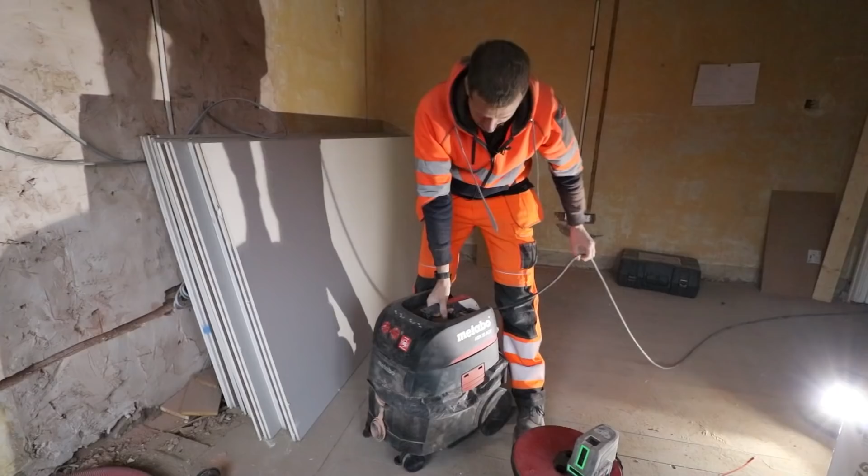Okay, it's Monday morning. Now, as you know, James has been having a bit of a laugh pranking us all, so it's our turn to do it back. So Jay very kindly ordered these in off Amazon, and they arrived this morning. So we love the LGBTQ community, all right? We love them, but nonetheless, it's a good giggle. So we're gonna slap these on his van and try and record him driving to work.

Right, got this camera set up, yeah? You're good to go, yeah? All right. Right, hello. What's someone doing there? To my van. He's just stuck something on the back of my van. There's part of the prank working.

How's my hair? Is it recording? Yeah, it looks fine. It looks fresh. It looks sharp. Oh, James. What about mine? You look beautiful. Thank you, buddy. All right, me handsomes, let's roll. Over and out, micro penis. And Tomo. I cannot believe we're doing

Okay, so house rewire. So this is a blank canvas, what we're starting from here. This was actually in previous content. I'll leave a link for it up here in a previous video. So it's a blank canvas, tenants have all gone, everything's been emptied now, so it's changed quite a bit since you guys last saw it. So head on in. Like I say, blank canvas now, carpets have all gone, furniture, that's all gone.

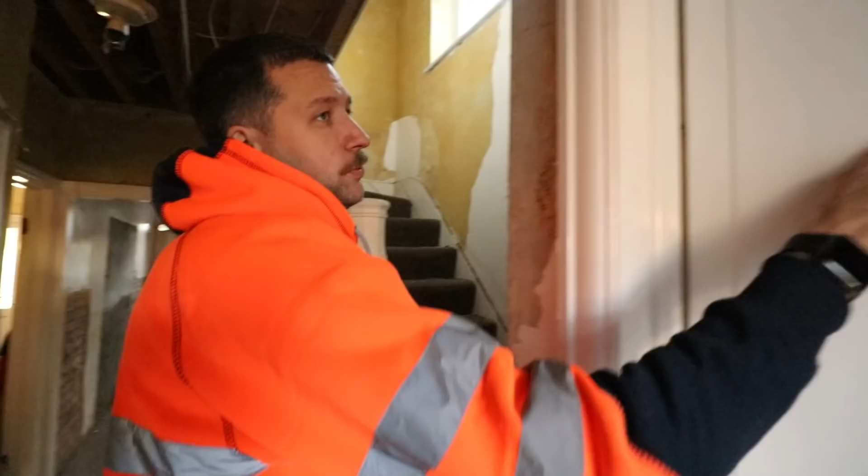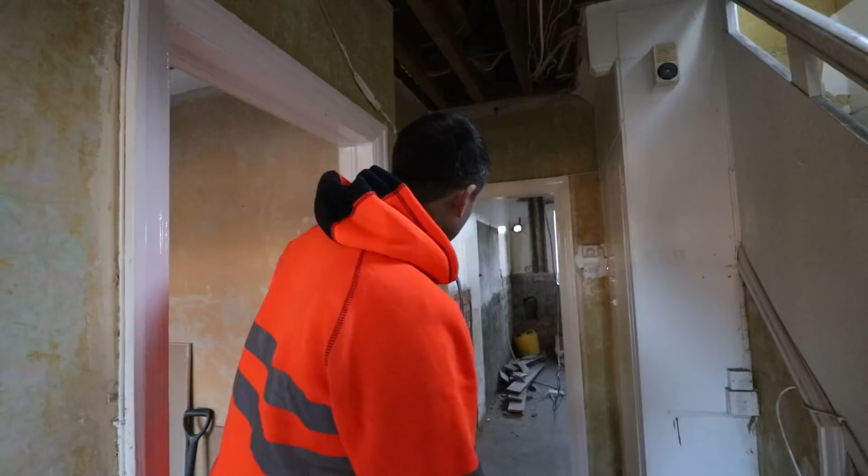Fuse board is up in there, you can't see it at the moment because the steps are in there. We just run this temporary bit of power, so we can just turn off the main switch and cut everything out, because all of this cabling here, we want to get rid of all this. So we've got a nice fresh blank canvas to start wiring in from, and it also means we can reuse the holes in the joists, so we haven't got to drill more holes and turn it into Swiss cheese. So yeah, the builders are out for the week, so that means we've got a completely empty property to work in, which is really, really good.

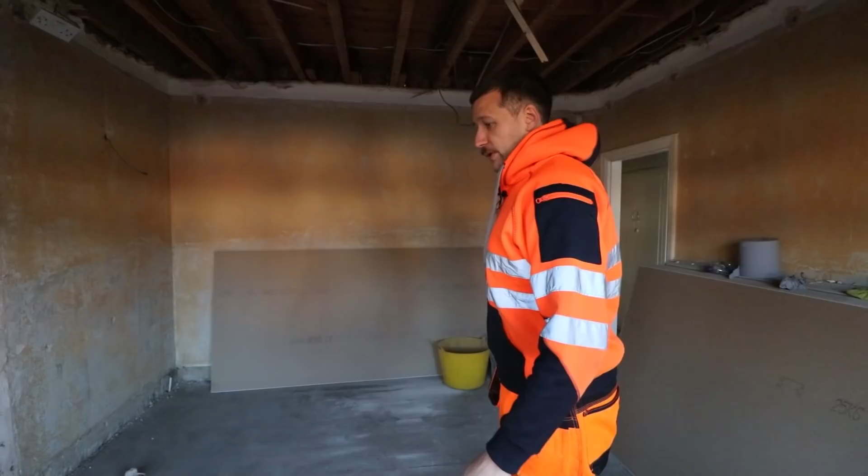So that's actually all their plasterboard waiting to go up, so they're just waiting on the first fix to be done. Now, we can't run anything under this floor because they're going to put like a concrete screed down to put underfloor heating. So that means all our power has got to come from up above. So again, all of this we're going to rip out completely. We're going to reuse as many of the existing holes as we can, but it does mean that our power is going to have to come from up above.

So we've got to chase. There's a lot of chasing here to do. So we have actually got a new chasing machine, which I'll show you. I bought it deliberately for this job because there's an awful lot of chasing to do, and doing it with a grinder and a hoover on little jobs you can get away with it, but on stuff like this you just can't. You need a proper tool to do the job.

So this is the front room. Dining room's through here. So James is in here now sorting out the heights for the sockets and stuff. Yeah, the green laser level is awesome, isn't it? It makes a huge difference. Rather than having the old-fashioned red laser lines, the green ones just pop out much more. So they're really, really good.

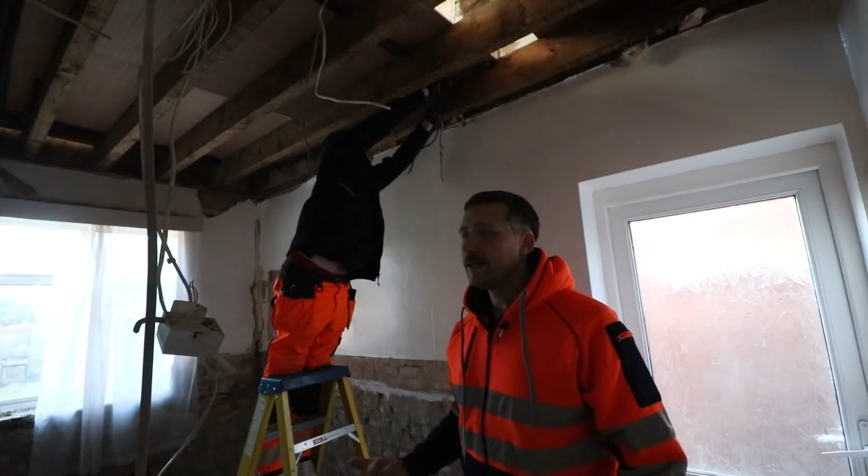So yeah, dining room. Jay's in here stripping out the kitchen. So yeah, this is the beauty of it. We can just cut everything out completely, and it does mean you can work faster. You haven't got to worry, is this live, is this not live? You can just literally cut the whole lot out. I'm guessing he's going to rip all these plumbing pipes out as well, but yeah, that's not our job.

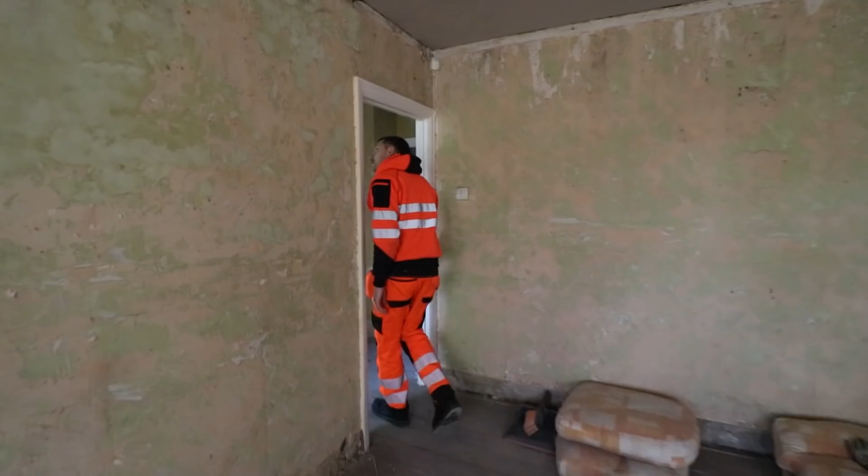So yeah, and upstairs, I'll show you quickly. This room I think was the sort of drug den. So as you can see, it's all empty now, and they've boarded the ceiling already, but we have got loft access just out here. So we can actually run a lot of our cabling over the joists upstairs, and we can cut all the downlight holes out as well. We can get those all cut out today. So there's quite a lot we can do.

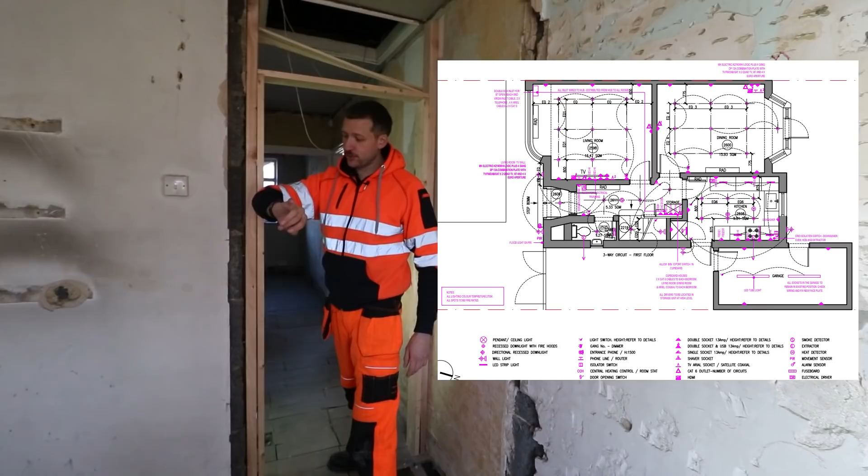I'm not sure what the layout is going to be in this bathroom. I don't know yet. We do have the plans downstairs. So that's what we're going to be wiring this week. Today's Monday morning, it's just coming up to 9. I'm hoping by Friday we will have the bulk of this first fix finished if there's 3 of us here, because there's quite a lot on this plan.

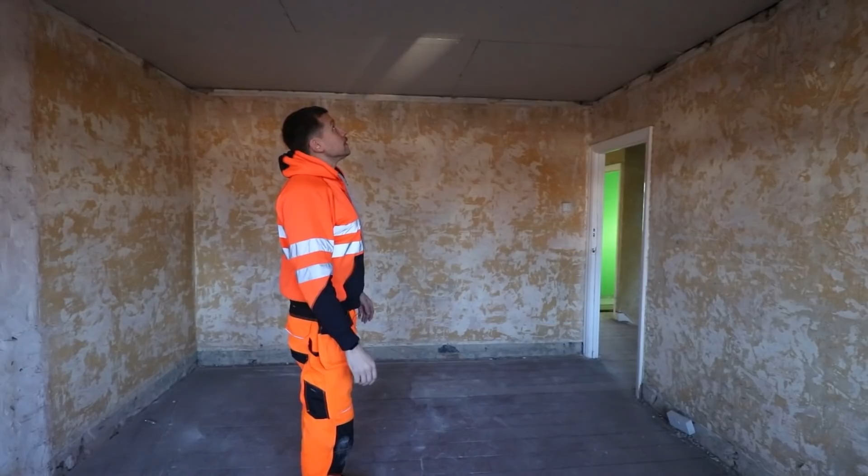Again, next room, plasterboard ceiling again, so it's already been done. We haven't got to worry about lath and plaster, any of that nonsense. We can just cut all the holes out, bang all our downlights in straight away. These sockets up here will be a little bit easier because we're putting them at 400 or 450. I'll check what they want. But again, we can run everything under the joists downstairs and just come straight up.

Light switches were on this side, but I'm guessing they're going to move this side because the door will naturally open towards the wall. So I don't know why they put that there in the first place, but yeah. So light switches will go here. We'll use our chasing machine, put our switches here.

And then yeah, little room in there, just a little box room. Again, completely empty. I haven't actually been up in the loft yet. It looks like a bloody big loft space, but we'll go up there a little later on and have a look. So let me give James and Jay a hand and we'll touch base a little later.

Oh, you've got to be careful, these Bosch, these new... What? No, I've got my own box of them. Your ones. I paid for them. Yeah, but...

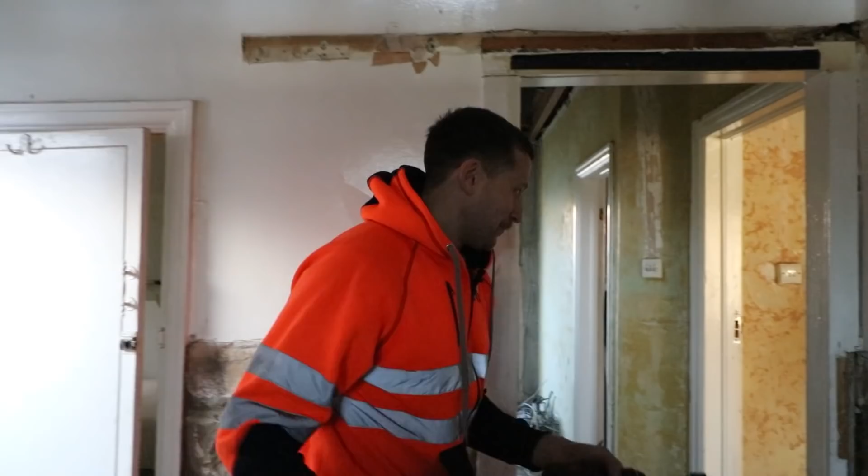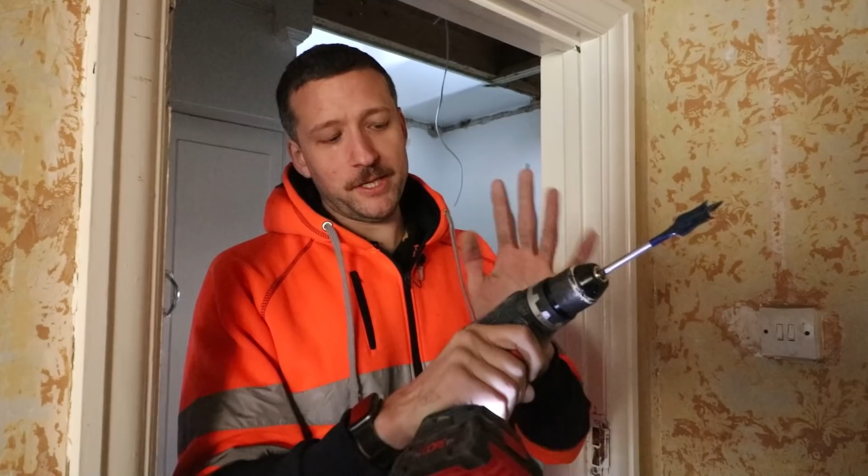No, these are actually my own ones. They're in that Vaunt case. I haven't used yours. The only thing with those bits with the thread on them is you've just got to be careful when you're drilling with them, because they can lock because they pull through so quick. They're brilliant, but you've just got to be careful. That's why I'm deliberately using this drill, because it's slightly less power than the big 18-volt Bosch one I've got. Because sometimes if it locks, it can really hurt your wrist.

So, right, someone's got to go next door and be the good Samaritan, because apparently there's an old couple next door who don't appreciate a lot of noise. Now, obviously, we've got a lot of chasing here to do, and it's just going to make a lot of noise. So, in being good Samaritans, one of us has got to go. So we're going to pull drill bits, and whoever pulls the 16, was it a 16 mil? Yeah. You've got 32, 16, and a 20. So whoever picks a 16 mil's got to go.

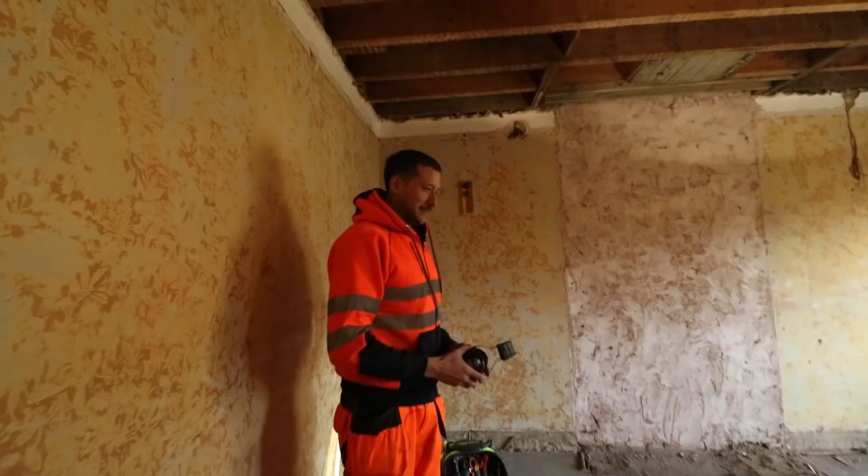Right, Tom first. Straight away 16 mil, yes. Yes! That's a shit game. Let's do another. I'll go around next door and tell her to put these on. Do you think they're going to invite me in for a cup of tea? I'm going with no. They might not even be up yet. Oh no. Here we go. Hi, my lovely. I'm sorry to bother you. You're a star. All right, you have a great day. She seemed very pleasant. That's how it's done, see? I always think she wanted to invite me in for a cup of tea to discuss the work. Nah, she's all right. She's got some china figurines she's got to move, so I'll let her use those, then off we go.

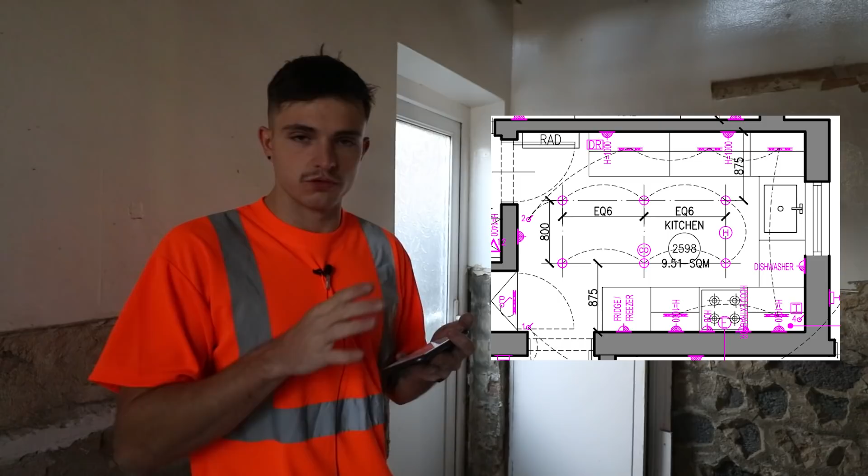Alright, Tom's checking in some lighting circuits. I'm going through the plans for the kitchen now and just marking it all out ready for chasing. So we're going to mark everything out, and then one of us is going to go around and just chase it all out. I'll leave the plans up on screen, but it looks more complicated than it is when you actually go room by room, but there is a lot going on, to be fair. So I'm just trying to wrap my head around each room at a time and working through it, but it's not too bad. So yeah, we'll see you in a minute.

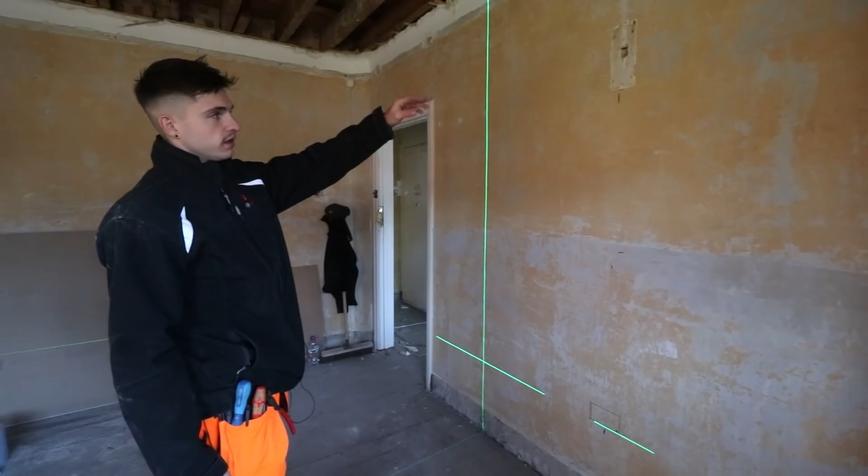Right, I got my jacket on now because I'm freezing, but I'm doing the living room telly, sockets and aerials and data and whatever else. We've got a plan which we'll leave up here somewhere. So it's just about making it look the neatest possible. On the plan, there's like 3 doubles on the bottom, then a couple of bits above. So I'll evenly equal it out center to the room, even though they're probably all going to be covered, but it's just OCD. So we'll start marking it out, show you what I'm doing, and then we'll do the telly bit above. I think they're gonna have a brush plate as well, so they can drop some HDMI cables, and we'll put a bit of trunking in there so you can just slide down and leave a fishing wire in there. So yeah, we'll get to it now.

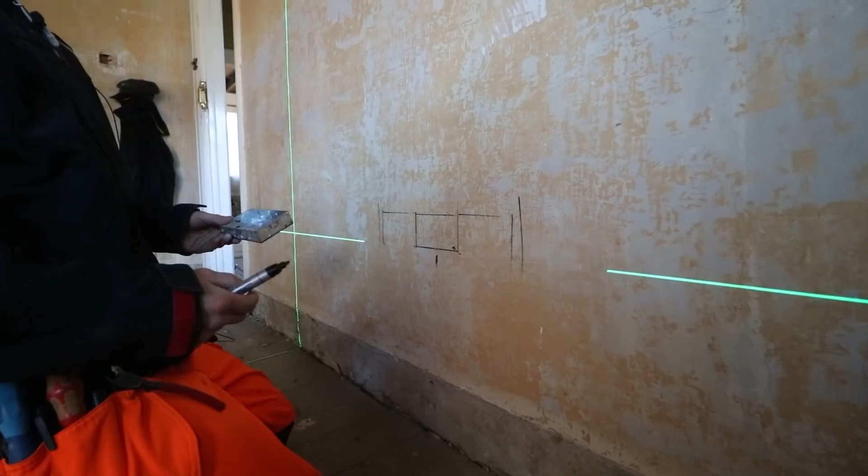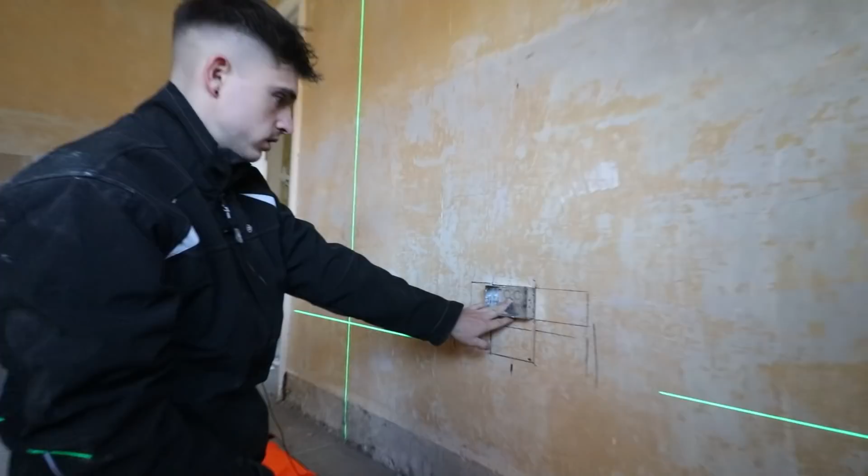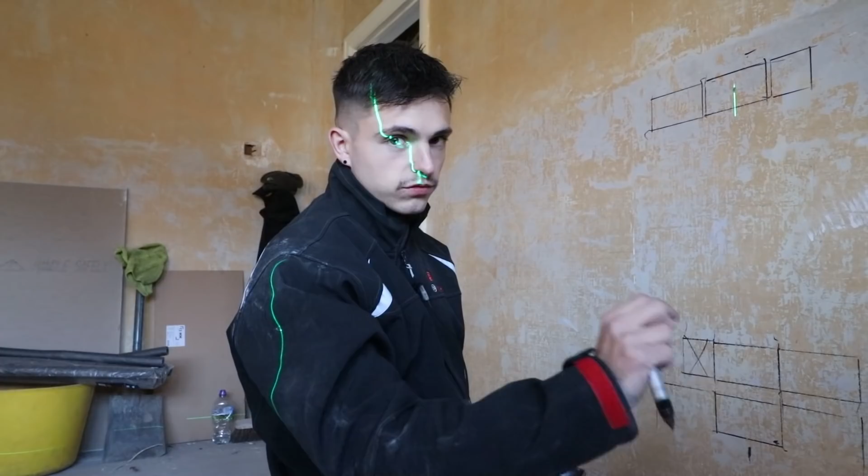Alright, so we want to probably chase to about here, just gives a bit of room, and then it was a double above this one, I probably want a coupler in there or something. Probably better off just cutting out a big square anyway. And then that one's scrap. Ignore that. Then I need a single here. We'll make all these one big chase just going across, and then we'll put bushing couplers in between each one. And the same down here, we'll probably do one big square down here, fix it all with bushing couplers, so we can feed in the cables. It's kind of rough at the minute, but it's just so we can visually see it.

Right, cheeky little update. Lights in the kitchen are done. We're working off plans that have been sent to us, but what's on plans doesn't necessarily work in reality. They had a 7th downlight just here by the door, but it's just going to look weird to have 6 and then this one extra one here. So we've scratched that, and we're just going to keep 6 because it gives a much more uniform look. Sockets have all been marked out, James has marked these out.

Now we put the sockets at 1150 centre, so that's different on the drawings, because if you look at the drawing, it says these have to be at 1 metre, but the top comes up to 900, then you've got 40 mil of worktop, so those are actually only going to be about that high off the top. If they've got a splashback or something going in, which they're probably going to have, it's going to foul the socket. So we put them at 1150, which should give you about that much off the top of the worktop, which is what you want. So you put those in.

Outside light feed, because there's going to be an outside light at the back, and on the side passage there's another one there. So yeah, and then light switch here. We're going to cut all these out a little later. We just want to get the bulk of the wiring in, and then we can run around with the chasing tool afterwards and put all the chases in, rather than chase a little bit, then wire, then chase. It'll just get all the chasing done in one hit.

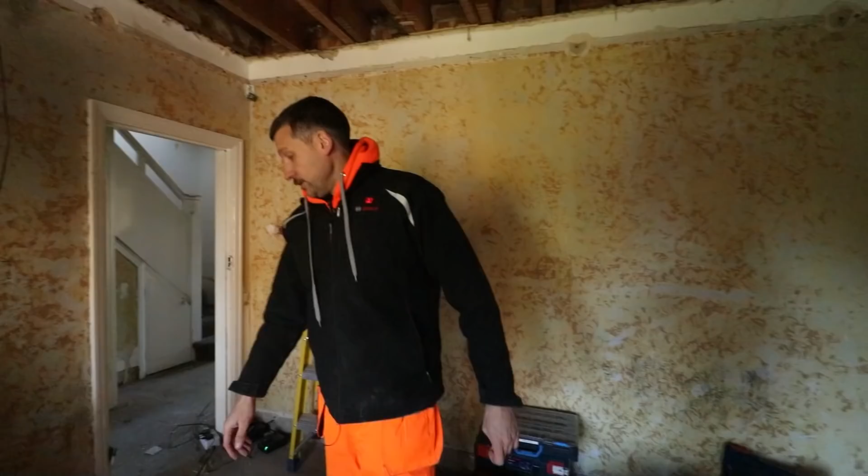If he's watching, I don't know, Pornhub or something, I don't know. That's the only thing I can think of. I can't think of another reason you want to switch it in that combination, but that's what he's got. And yeah, James is this side holding up the fort. He's marking up, or holding up production, I should say.

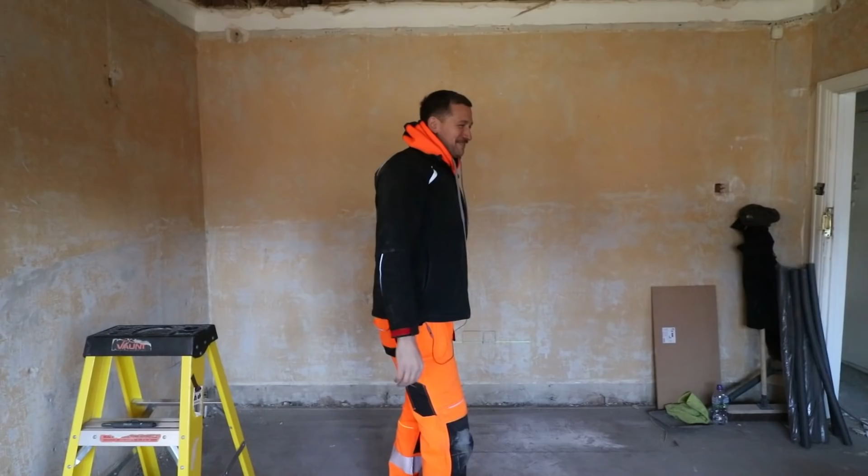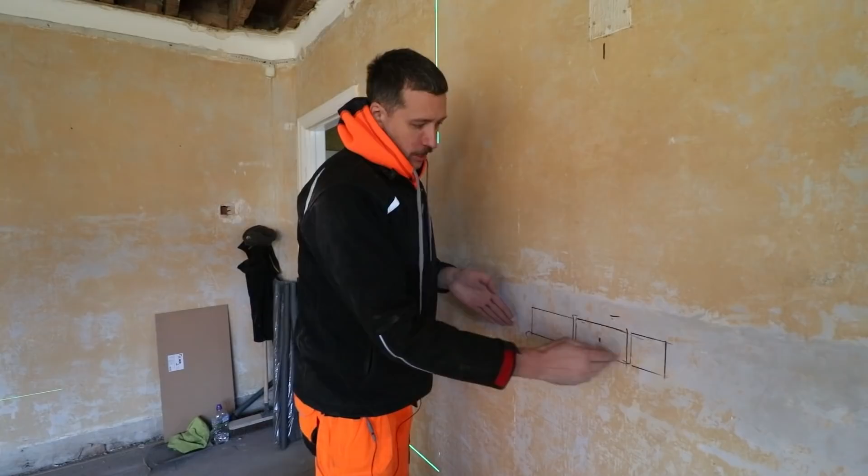He's marking the sockets out again. So I'm guessing, again, they're going to have a TV here or something, because they've got 2 levels of sockets here. So for these here, we've got 2 doubles and a single. I think we're going to have to use the grinder for this. So all we're going to do is just take a nice clean grind there, 2 cuts down, and then you can just chip this out with the SDS. I think that's going to be how we're going to do this.

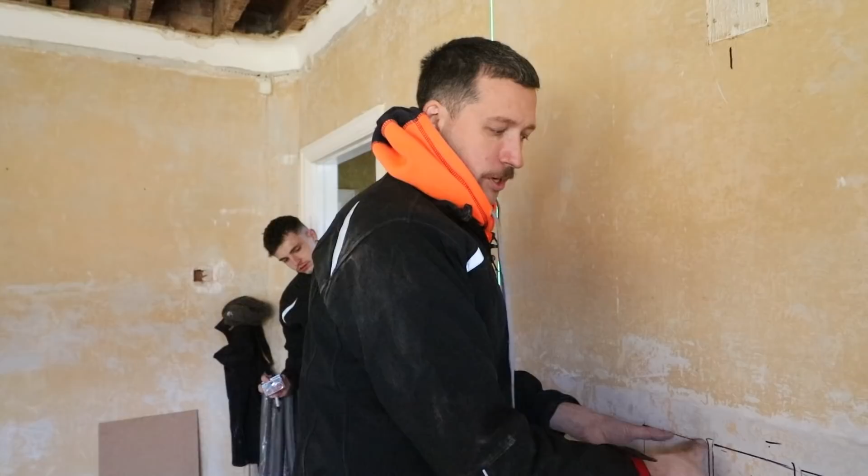And then the boxes, we're going to do what you saw us do on the house rewire. It was quite a while ago, but you get 2 boxes, coupler in the middle, pair of bushes. That way you get a really slick finish, and the distance between the boxes is exactly the same every single time. So it'll be quite nice down here where you've got different sizes of boxes and stuff, a really clean, uniform finish. So that's how we're going to do those. And I'm going to come in here now and do the lights in here.

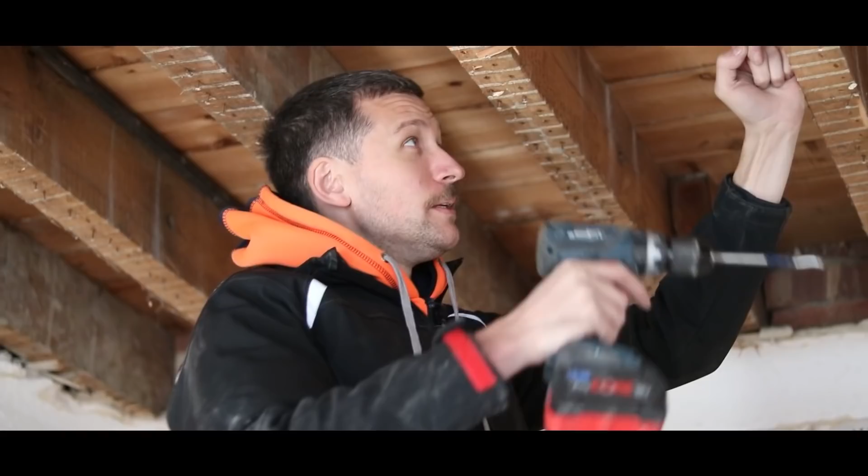Right, little tip. When you're bashing through joists to run a new set of holes in for cables and stuff, and I'm only saying it from my own experience, when you start a hole, just feel on the other side. Here I don't have to because you can see the whole lot. But when you're lifting floors up and you can't see everything, just have a little feel on the back and make sure there's no cables or pipes there, because I've done that before, boshed a hole through and hit something on the other side. So it does pay. 2 seconds, just give it a little feel.

But it has to be said, these Bosch bits are just superb. As soon as you catch a nail or something, you might as well throw it away. But as long as you don't catch nails or anything, they are so good. They're really, really good bits. I used to use the spade bits. I mean, this is a spade bit, but it's got that helix head on it. The normal spade bits, which don't have that, they're great when they're sharp, but they do blunt quickly. But that just helps it pull all the way through the joist.

So they are really good. Jimbo has asked, does Tom have the keys for the house? Yes, I do. He most certainly does, and we will wait for you here. If you have, oh, you already pulled out, alright, so all good. Thank you, micro penis. Just so you're not mistaken, that was humongous penis. Micro penis is driving and he is unable to talk, but it was humongous penis. Just, I know you were confused, it's fine, don't worry. It's an easy mistake, but yeah.

We're just on the drive home, and James wasn't too happy this morning about the little prank we pulled on him, so we put a different sticker on his van for the journey home. Go on, go on, go on. Oh, my bag's just gone flying in the back. He's only gone and pulled out, lads. What one is that you put on it? That's so gay. I can't even drive straight.

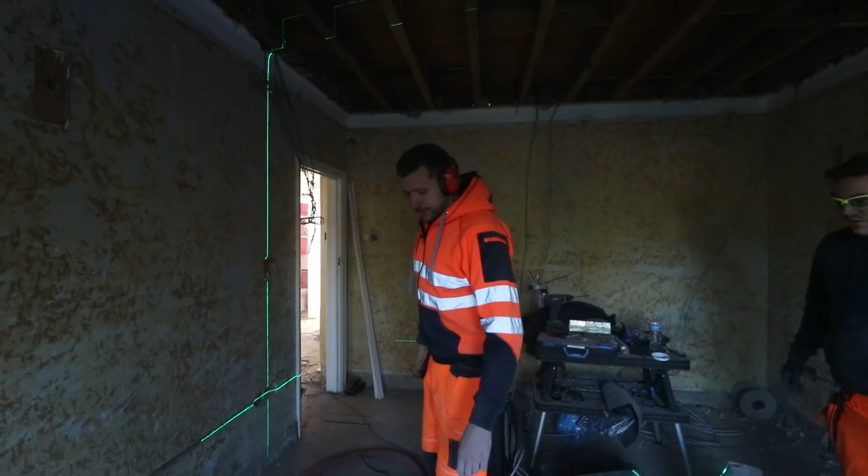Yeah, that machine. Hard work, innit? It's not too bad, but it does feel a bit weighty. When you do the upright ones, the more you start going up, the more it hurts. My shoulders hurt quite a lot, but that's a fantastic machine. Yeah, so this machine is mostly for doing the chases, the upright chases, where you've just seen we can put the capping straight in the wall, in fact.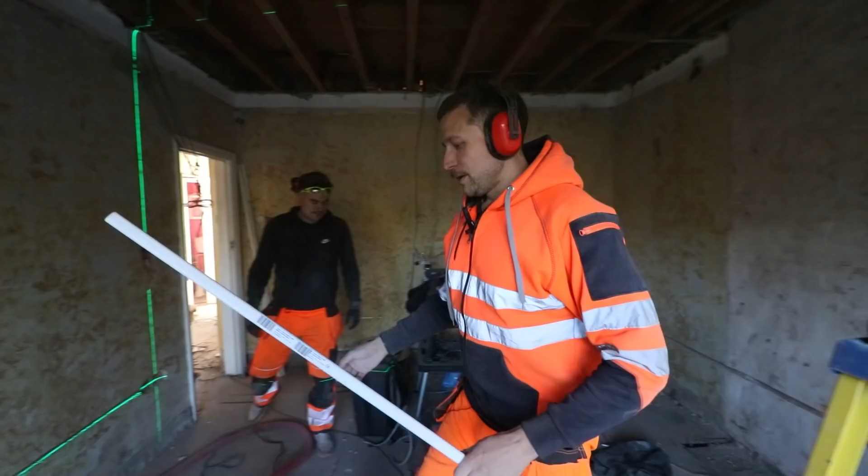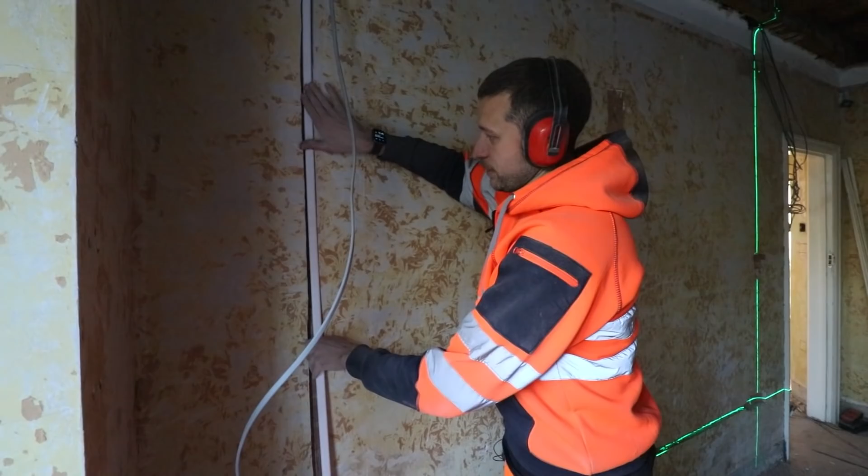But yeah, you just basically run this up the wall, it cuts out after you, so there's no SDS, no faffing about, and you can just put your oval pipe straight in, job done. So it's super fast. But what we've also found is we can use it for back boxes as well. This is a 25mm box, but you get the gist. What we've been doing, cheating a little bit. Well, it's not cheating, it's just finding good ways to work.

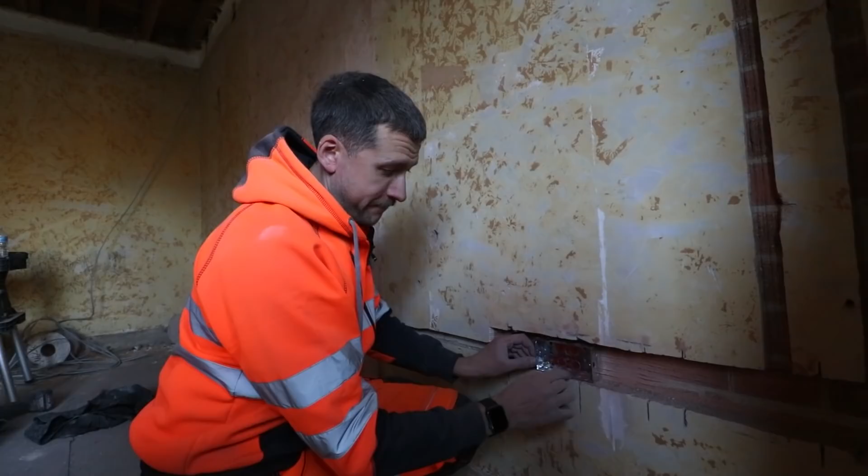But there are 4 double sockets going along here. We can fit 35s in here. So we're going to put, this is a 25mm box. But what a smooth back you get if you use that machine. You just go once, twice. You have to do 3 cuts for the height of a box. So 1, then do another one, then do a 3rd one, and that's it.

But on brickwork, you know when you're just using SDS, you can never get a smooth back when you use an SDS. Doesn't matter how good you are. You just can't get a good back. So doing it this way, you just get such a smooth, neat finish. And it's just lovely, you know. It doesn't matter where you put that box. It's always level, it's always the right height.

So although the machine technically wasn't designed for that, it shouldn't hurt it because you're just chasing the wall out just to fit a box. We didn't think we could use a machine for that, but that's actually a real hidden gem of an advantage.

This is what James is doing now. It's the only way you can get them nice and beautifully spaced and all symmetrical if you just use 20mm couplers and bushes and you join them all together like that. But by the time they put their dot and dab over that, you've got bags of room, you know, happy days. By the time that's finished, that will look really neat and everything will be perfectly symmetrical.

When you put sockets on top of each other, you can't really keep that bit, because this is quite loose, see? It's just this old plaster, so this all naturally falls out. So in the end, we were just like, I'll just get the cutter and just cut all of that out. And then you've got one nice blank canvas to work on. That'll look nice when it's done. That's the plan, bushes and couplers. As you were, mate, sorry.

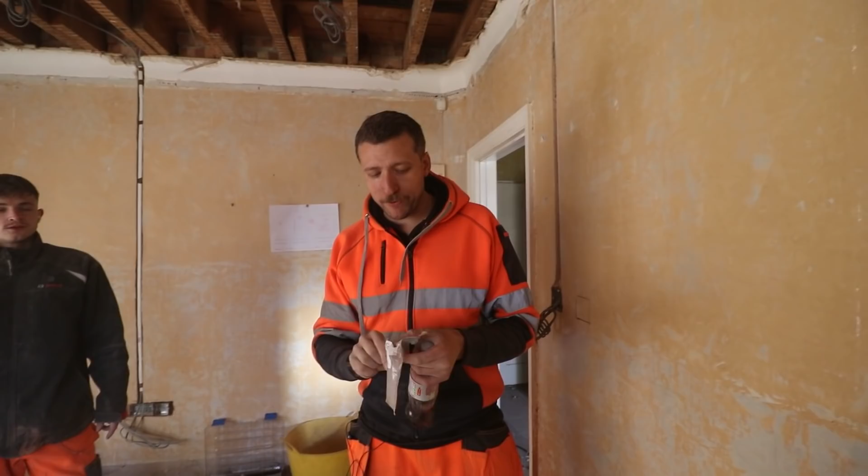To hold the capping in, we're using these little 20mm oval clips, like that there. And then you can just take the capping and click it straight in. So you haven't got to faff about with screws at a 45-degree angle and stuff. So that's quite a good little idea. You just use them, bop, bop, bop. It's very quick if you've got all the right gear.

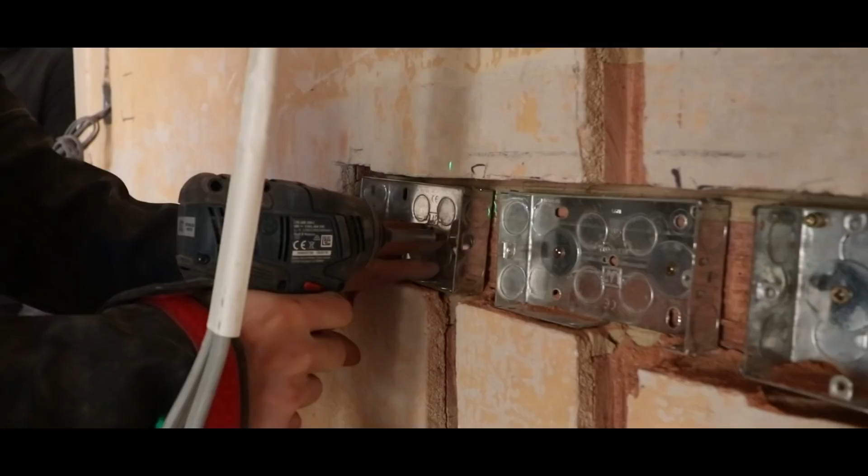That hurts your shoulders when you're doing it all day. I said in that review, I'll leave a link here for it again, it is easy on the first one, but when you're doing it for like 8 hours solidly. Jay, we've been doing this since 9 o'clock this morning. We couldn't make any noise till 9, so we started bang on 9. And to be fair, we've worked that machine hard all day.

We've been taking turns on it. James started this morning, I did the lunchtime bit, and I've just done one now, but Jay's doing the afternoon slot because it is hard work. I can really feel it in my shoulders. It builds your muscles up if you did that every day, but it is a good bit of kit. There's no dust or anything. I think I've said that about 100 times.

There was somebody in the comments, I think on James's last video, I'll leave a link here. Somebody got really angry because he kept saying the word obviously. I mean, obviously it is irritating, I get it, but that's just how he is, obviously. It's just a habit, you know, you just have those things, obviously.

The fella here, he's got sockets and he wants to run data to a gigabit switch out in the hallway. I can't run it down the same pipe, so we've got to do power in one chase, and then I'll do another one here for a pipe for data. Once we've done the chases, once we start putting the boxes in and wiring it, it'll make more sense.

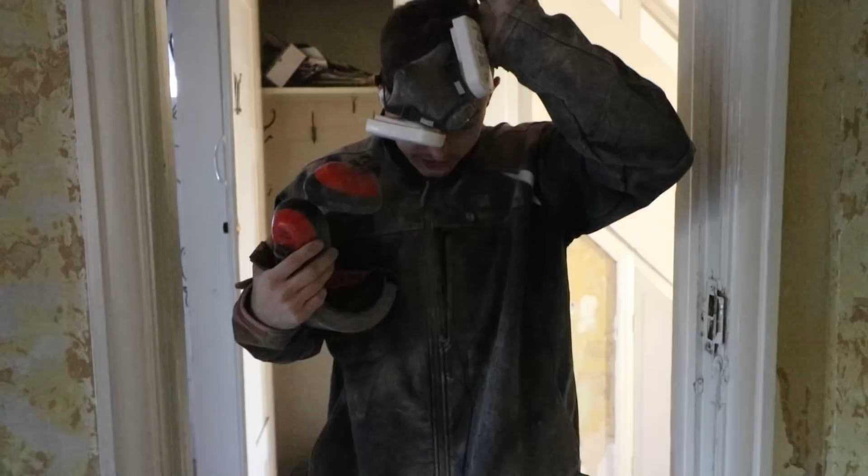Oh no. What a day. Do you want me to show you what I've done upstairs? Chasing, I love it. This is what I live for. Forget the board changes, I just want to chase from now on. Come on, let's go upstairs. Watch all this dust fall off me now.

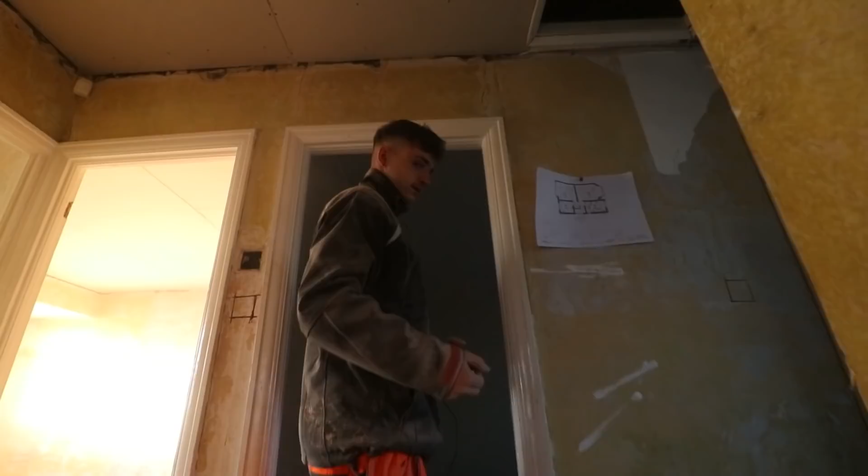Absolutely none, don't worry. Yeah, it's a bit dusty.

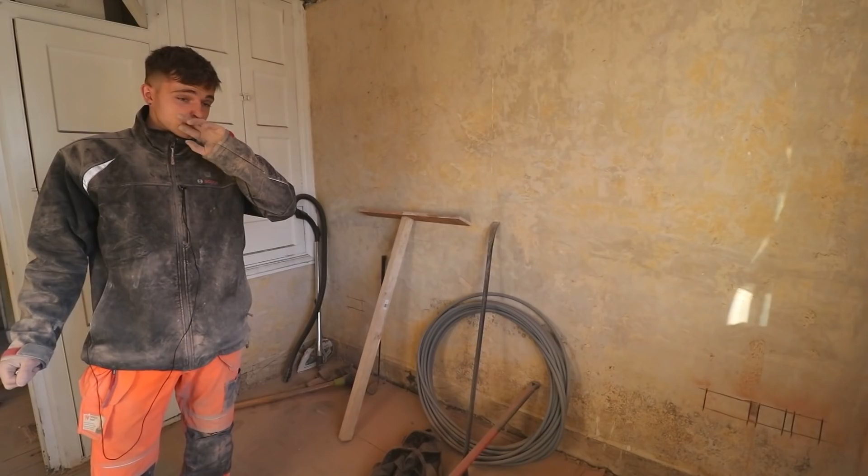So all I'm doing is just outlining the boxes ready for the other chaser, the big chaser, just so we know exactly where the boxes go. Because obviously when you do one big line, it's hard to remember what was there exactly, and it just makes it easier for the next chaser. So yeah, I've just gone through all the rooms to do that.

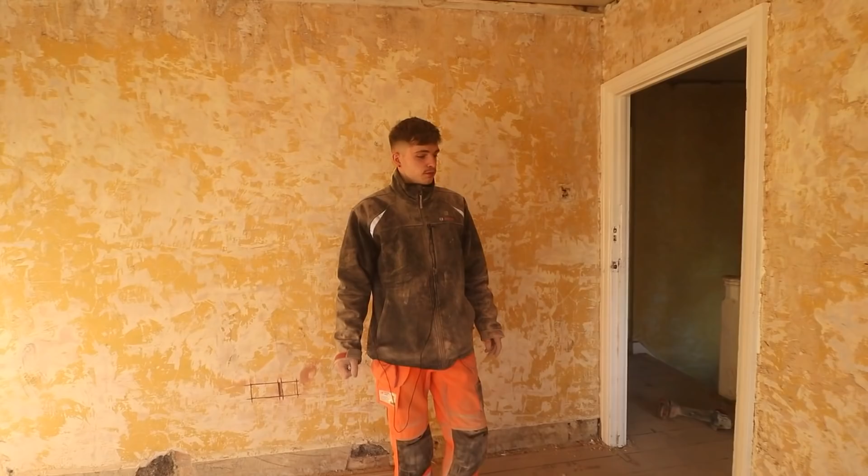But yeah, I'm waiting for the kitchen to be chased out downstairs, so we can start running all the cables in, finish down there, and then come up here. So it's just something to get on with. But hopefully that can be done today now, and then by tomorrow I think we should have everything wired, chased in and fixed back. But we'll see.

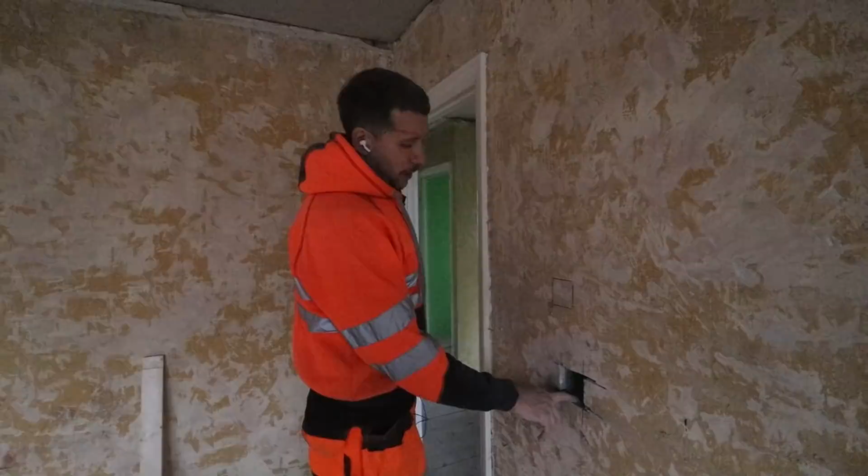Now, we are facing a slight issue. These inner walls, we want to fit 35mm boxes because it gives you more wiring space, just makes it a bit easier, especially when it comes to second fixing. Harder to do on the first fix, but easier on the second fix. Only problem we're finding is this is a really thin wall, and you fit 35mm boxes and you're blowing through into the next room. I can put my whole hand in there, you're punching through to the next room.

I don't want to fit 25mm boxes because they're harder to wire into, especially if you've got, like here, a 3-core strapper, feed in, feed out, switch wire going out to the lights. It's a lot of wires to fit in a 25.

It scared the shit out of me then. A little attempt at humour was that.

So I think what we might do is put a 35mm box in, get some of that low expansion foam, and just foam the box in, because we're not going to be able to drill any further in to get a fixing. So we might do that on those, I think. Same with this wall here, trying to fit a 35mm box again, blown through. These are just single skin walls. There's not enough.

No. It's all right. As long as it's nothing to do with my vans, I don't care.

See, this is what I'm on about with brick. Jay's up here because we've only got one of those Metabo machines. He's using an SDS to dig out the back boxes, and this is part of the problem. When you use that Metabo machine, you get a really clean cut at the back. This is wonky, wavy. It's just a bit crap. But I might come up here with the machine and see if I can neaten these up because, yeah, single skin. That's what you get.

Downlights, we'll cut those in today. I've got the downlight cutter, so we'll measure all those out. You can join in on that. We can cut those out later on today.

Yeah, sorry mate, you're all good.

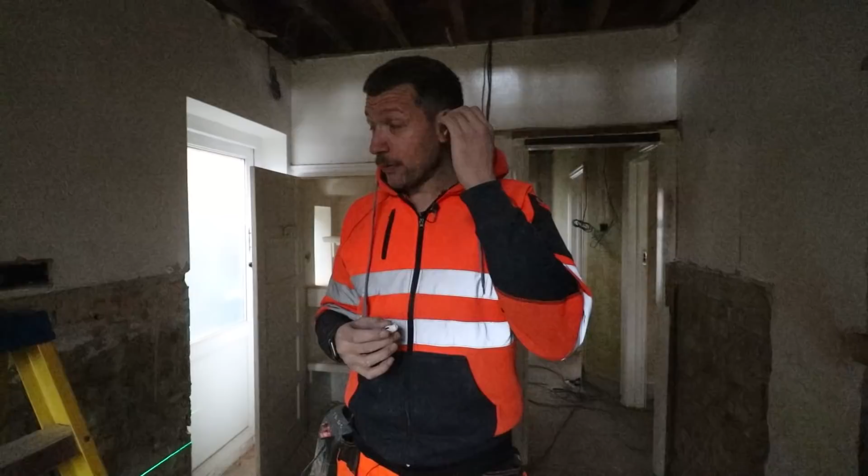They're just 180 quid and they're worth every penny. Actually, they're really good on the tube because it's so noisy, especially when the trains are turning the corner on the rails, and you just put them in, switch on. You don't even have to listen to music. You can just activate the noise cancellation bit, and it just drowns everything out, and it's just like being in your own little bubble. It's fantastic.

Found Sarah an iron. Perfect. Chuck it in the van. Excellent. Sarah wanted an iron, just found one.

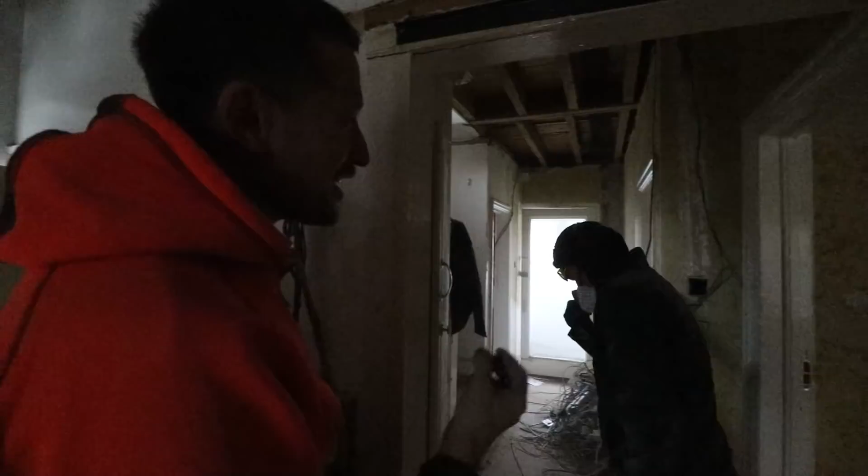Perfect. He's a bit weird, is Jay, but I like him. Huh? All right, mate? Tom's a bit weird as well, but I like... God, I didn't think you heard that, mate. He's a good fella. I like him.

Right, this is smooth, right? I've worked out that if you're really nice to neighbours, they actually don't mind if you just tell them every day what you're doing. So I'm going to be really nice because they're an old couple, right? I'm going to go to Tesco now. It's not very posh, but I'm going to get some flowers, drop them by, say thank you. She's going to love it because we're making a cataclysmic amount of noise against her wall today. So yeah, watch this, and some chocolates, depending how expensive they are.

She is old. What do you think she likes best? She'll probably take the price tag off. She's going to love this. Every woman loves Ferrero Rocher. The problem is, you stand here in the queue, and it just looks like you've cocked up with your girlfriend or something. 13 quid. She better shut up after I give her these flowers. Let's take the barcode off and price tag. This better be worth it.

I think it is, because it does make a difference, and it's easier to work, and they're far more forgiving of noise that you make. To be honest, I don't think they can actually hear, because James went there yesterday, and the husband answered the door, and he had to repeat what he wanted to say 3 times before he heard it. So I actually don't think they can hear very well.

Heya, sorry to bother you. It's just a quick bunch of flowers, just to say thank you for putting up with the noise next door, because it's not nice to listen to the noise. Well, today's the last day of noise anyway. No problem. You have a great day. To be fair, the noise in her house, I can hear Jay upstairs hammering away with the SDS, and you can't hear yourself think in that house. So it isn't nice, but little gestures like that do go a long way. Listen to James.

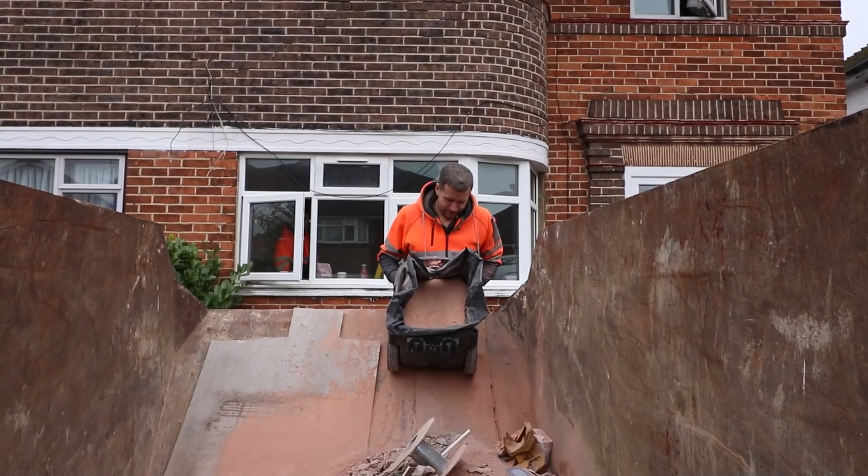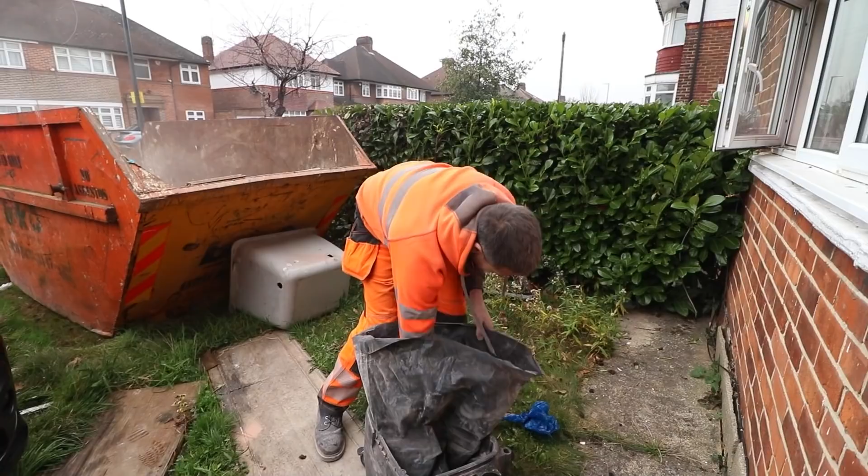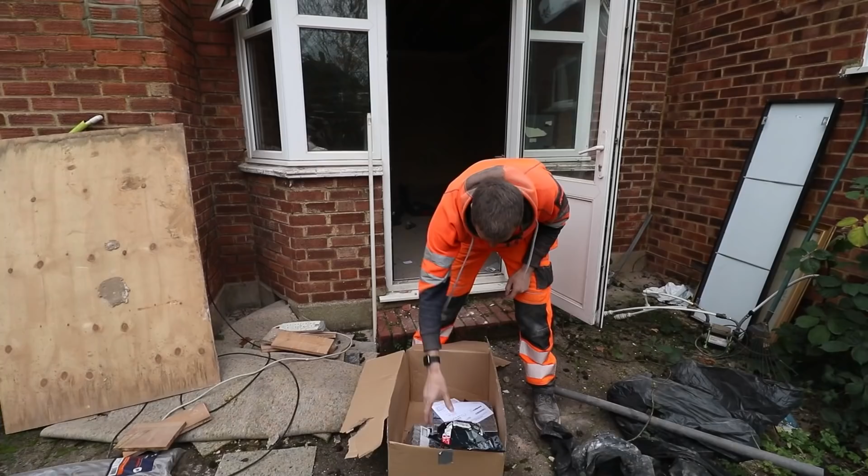That was easy. All right. Now, Screwfix has turned up our order. Wasn't too bad. I got a second mask as well because we need one in there, and a load of back boxes, and they give you free chocolate if you order. Apparently, because it's the second time we've done this. Well, I did it the other week, but yeah, they give you chocolate every time. Yeah, I didn't actually see how it turned up. Apparently, the camera guy saw he was on a scooter. I don't know how he fitted that on a scooter, but

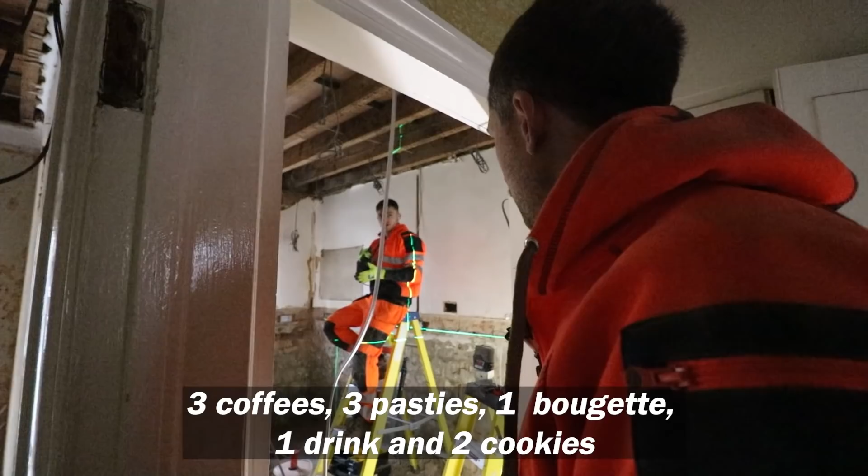Do you want a piece of 12? Because I'm not giving all to James now. Yeah, I'll do it. You can, yeah, you bought it on my fucking credit card. Hello, you. I bought that on my own credit card. £25? Yeah. Shut up. You did. What are you on about? All of that shit, mate. What are you on about? What, the coffee? 3 coffees, 3 pasties, 1 baguette. But he buys himself an £8 baguette. Drink and 2 cookies. Do you want a bit of chocolate? Yeah. Right, would you like a bit of chocolate? I might, thank you.

Right, anyway, yeah. It's going all right. Bosch man here is doing all the sockets in here. Laser levels are brilliant. You literally can't do sockets in a kitchen without a laser. They are fantastic. Yeah, it does make a difference. It just makes it so much easier to line up sockets. Otherwise, you're measuring off beams and stuff, and you don't know whether those are level or not, and you end up following whatever you're measuring it off, but doing it this way, you get a perfectly true reading every time.

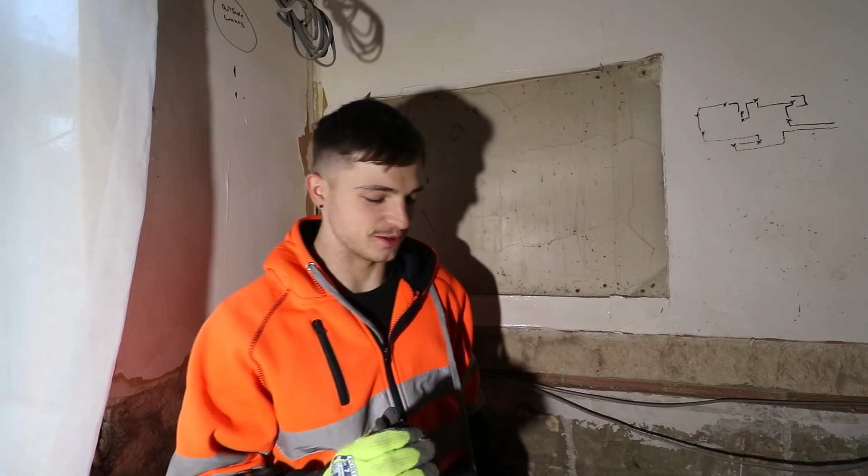I need to ask people about the Instagram. So I had a girl follow me, and my girlfriend knew in 2 hours that I followed her back. How? She won't tell us how. She hasn't got my account details. How does she know? Honestly, she won't tell me. It's creepy. We are all single now. Yeah. Girls. No, this can't stay in the video. This can't stay in the video. I'm staying in, I don't care. I don't know. I'll have to check it. I don't know if it's going to stay because it's going to cause more issues. I'm the boss. That is staying here.

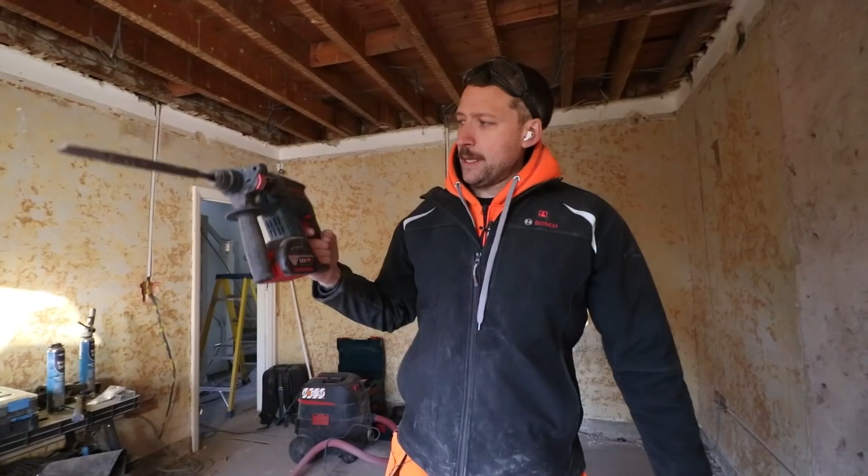Gotta be honest though, that was the one Bosch sent a couple of weeks back. You know, I did that Bosch unpacking video. I'll leave a link for it up here.

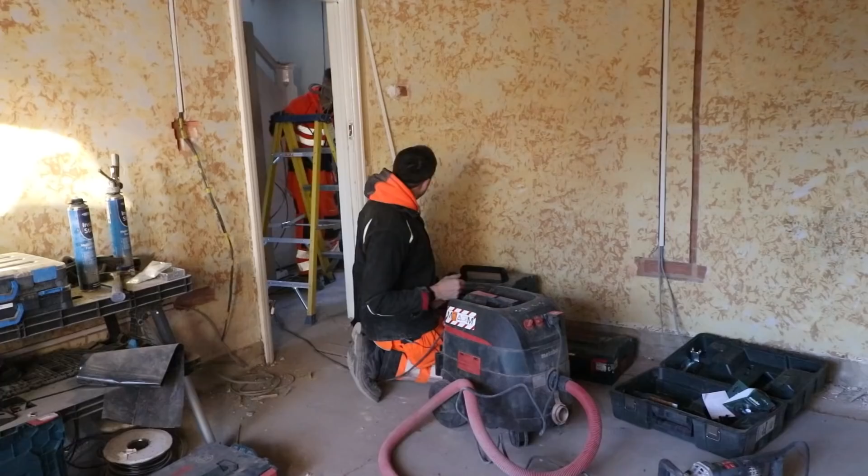That is small. In fact, where's the small? Hang on. Let me go and get the bigger one. Let me go and get my big one. Come here a sec, look. James, he's in a world of his own now. He's listening to Postman Pat or whatever it is, but he's so paranoid about his tools, right? Bear in mind, right? I provide them, yeah? He's labelled everything of his own.

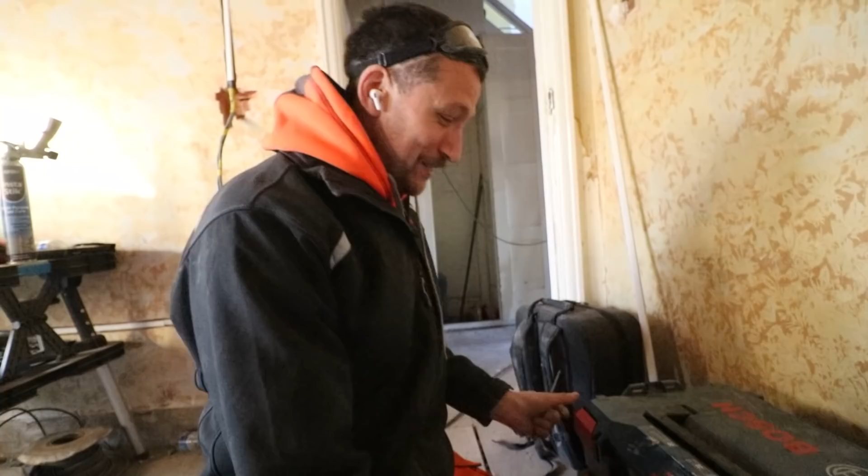Yeah, the point of it was this one, this big Bertha. This is... Yeah, point is this big beast here. This one I think had 2.7 joules of impact energy, I think. And this one I think's got 1.5 from memory. But that is much lighter. It's a proper light. That's good if you're doing like big holes in walls. Yeah, if you've got like a 32mm hole you want to bosh your way through. That one, we've got the SDS, the chisel bit on it, and you can use it for that, but it does take longer. But if you're literally just boshing 5.5mm holes, which is what most sparks do for like red plugs and stuff, honestly that's more than enough.

A little mini 18 volt, I really like that. It's got more guts. Do you remember when I had the Milwaukee one? I had that 12 volt Milwaukee gear, and I swore by that little 12 volt Milwaukee SDS. Well, this is good because it's got the hammer action only on it, which that one didn't have. Tiny bit heavier than that, but lighter than this Bertha. When you're on the top of a ladder, that gets a bit cumbersome. But that's another one I'm quite impressed with. There was another tool I meant to show you, but I can't find it now. We'll discuss it later.

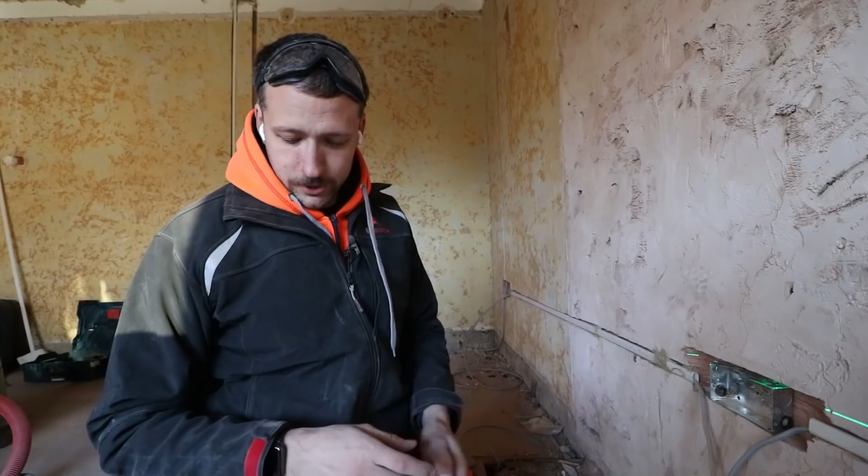Right, tip 6274. When you're working with back boxes, when you put the screws in, you can use countersunks like that, right? I think I might have mentioned this already. They protrude on the surface, and sometimes you'll get neutrals and stuff, they'll catch them and you get neutral to earth shorts. If you buy the pigtails, the curly whirly ones, they come with those screws as standard, but I find we normally take those out and use a 1.5 inch 8 because they're better. But if you take those screws, they've got a really flat base, and when you use it with a 5mm penny washer, you get a super flat finish.

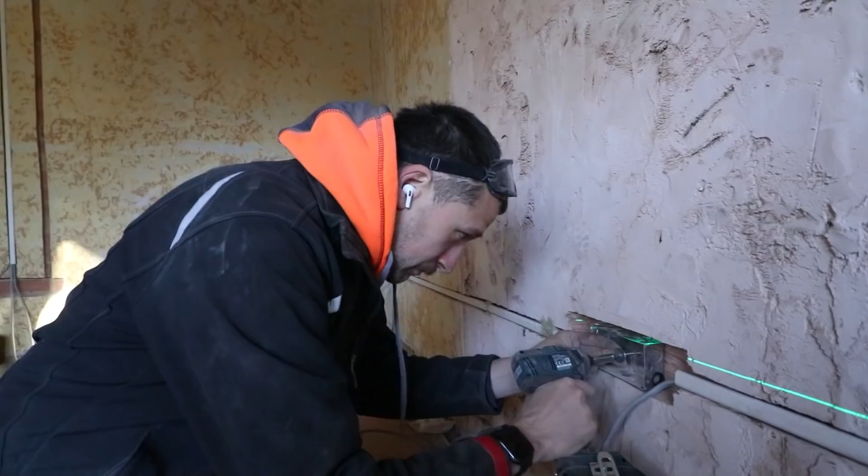Look at that bad boy. And it just looks nicer in a back box. You don't get any sharp edges or anything like that. So it just gives you a bit of confidence, I think, when you wire in the box and you push the socket front back onto the back box.

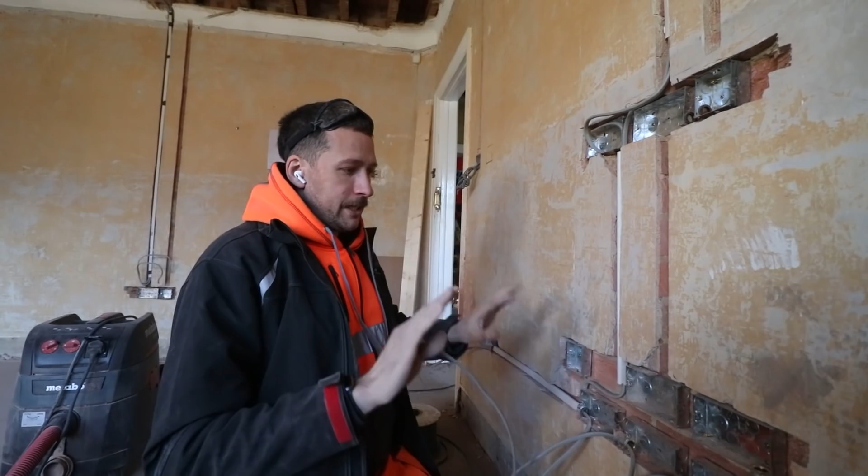Right, Team Nagy. So I'm wiring up the first fix for the TV and data area. So living room, he's going to have, I'm guessing, quite a big multimedia system here. So I wanted to put 35mm boxes, like I said, wanted to put them here. We can't, this wall just doesn't allow it. We blow through the other side of the wall.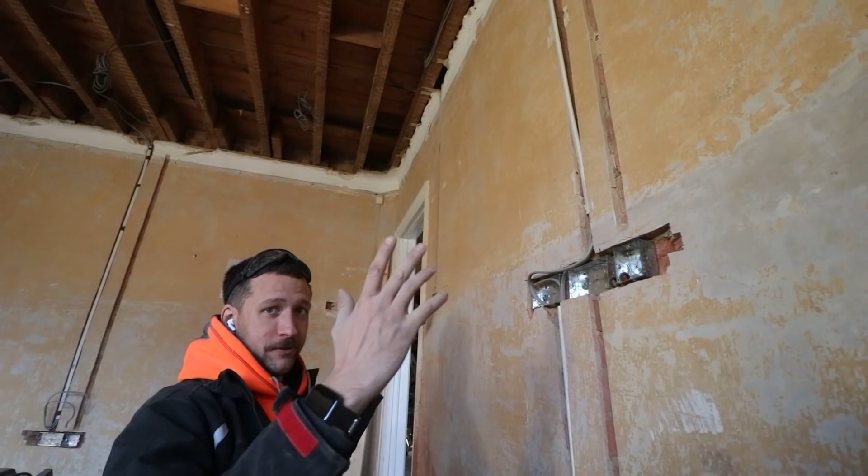So we've got to put 25mm boxes here, whether I like it or not. I actually thought these would have been higher up, but on the plan, that's what it says. So I'm putting them where the plan says. I thought they would have been higher up. You have a big, like 50, 60 inch TV, you'd want to have these higher up. But I'll check, but I'm going with what the plan says.

But anyway, a double socket, a brushed plate here. So the TV will sit, the bracket's going to sit here or something, and the TV will sit over these sockets. So you've got a double socket. This is going to be like a brushed plate. You know the plate with the brushed sort of feathery brushes, and you can just basically push like a HDMI lead or something through it. So he's going to have one of those here.

We're going to put a trunking in here. So when they plaster over, there's going to be basically a hollow gap. And this is also going to be a brushed outlet here. So if he's got like a 2-meter HDMI lead or something, he can just run that straight in then. Or the optical cables, maybe he wants an optical cable for a sound bar or whatever. So that's going to be double socket, brushed plate, and then there's going to be a data port there.

So an RJ45 jack. Down here, we've got 1, 2, 3, 4 double sockets, because there is quite a lot of kit. So that's eight socket outlets, so to speak. Brush data port, RJ45 ports, double socket, double socket. That's the plan. So I'm trying to figure out the run because the ring comes in up here. So socket comes down to this one. It'll do all of these ones and then back up again, which is what I'm wiring now.

We've allowed for 3 of us here to do the first fix. Well, we've got to install the alarm system afterwards as well because he wants to have an alarm system fitted, which was extra. We didn't know about that, so we've priced extra for that. So I allowed originally 3 of us a week to do the first fix. However, he wants the alarm system, so that's going to roll us into Monday and Tuesday. So that's fine. Well, it's actually 4 days we're going to be here because we're going to be in the office tomorrow. So 6 days for 3 men to do the first fix here, which I think is about right because there's a lot of stuff here he wants.

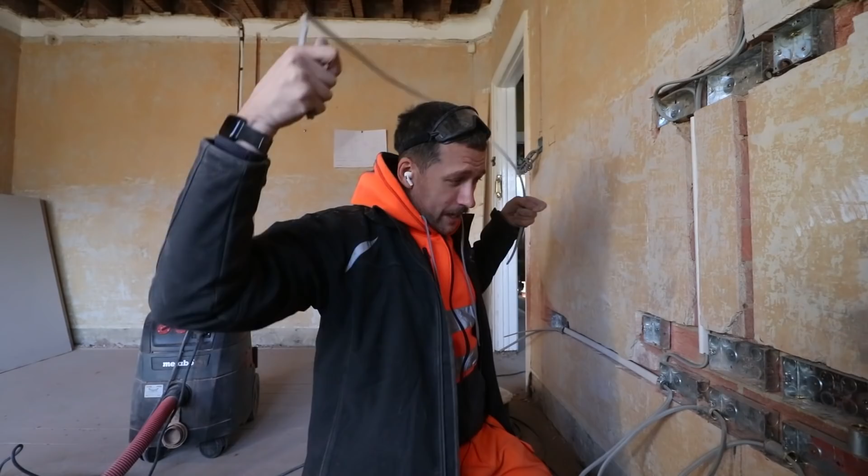It's not just the plugs and the lighting, there's also the data. So all of these have got to have data cables run into the cabinet, which is going to be in the hallway. So there's going to be about 30 or 40 data cables by the time we finish. A lot of stuff going in. Plus the garage, I haven't shown you the garage yet. So yeah, I shall talk over the noise, I don't mind. I've allowed 3 people for a week for the first fix, basically.

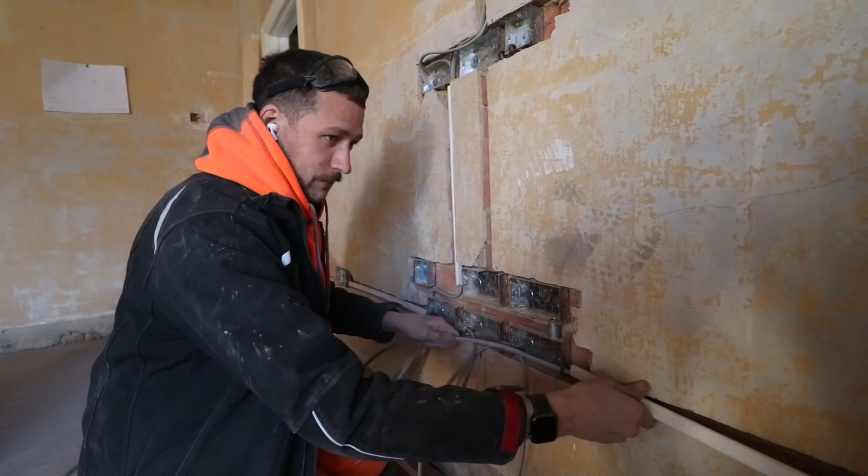I know what Jay's doing. He's having a good giggle upstairs. I guarantee it, he's just sitting on the floor. That's what he's doing. Guarantee it. Jay-o! You all right up there? I'm good. Can you hear me slagging you off? No. Oh, good.

So yeah, that's what I'm doing here. It's pretty mundane at the moment. As soon as we've got something a little more interesting, I'll update you accordingly.

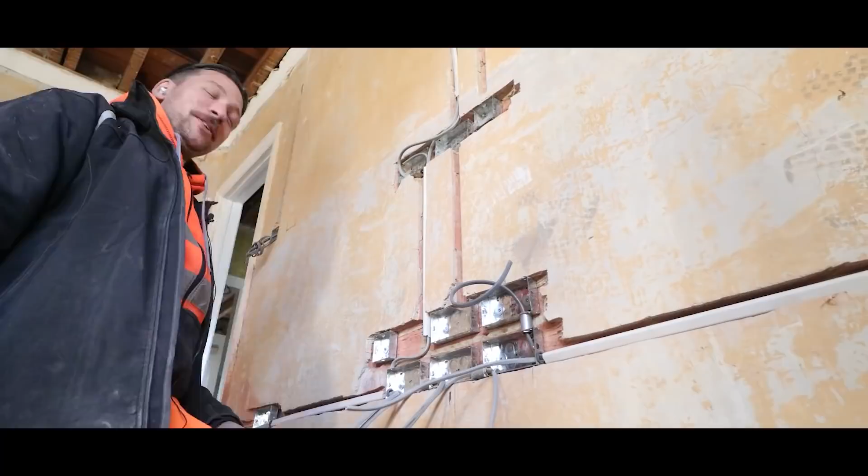Yeah, so just continuing the whole, seeing as we're both not single, the whole double standards thing, right? So this is another example. I want to understand it, and I don't get it, right? I come home quite late, to be fair. I don't get in the door much before 7 o'clock, pretty much every day. But I got home and had a bit of dinner, and then it was about 8 o'clock, and she was like, oh, I'm just going to get on the phone to a friend.

And she's got a friend who, when they get on the phone, I could literally drive to Bristol and they'd still be on the phone. I don't even know what they talk about for so long, but anyway, she was like, oh, I'm just going to ring her. I was like, all right, fine. And I knew it's at least 90 minutes. I know it's a 90-minute phone call minimum.

How do you talk about 90 minutes? I literally don't know. Anyway, I was like, do you know what? It's gone 9 now. I'm going to bed. I'm not waiting up. So I sat in bed for like another hour on my phone, and it got to like 10 o'clock. I was like, I'm not waiting. I'm just going to go sleep. I'm not waiting up. Honestly, 12:30, she walks in and she like rolls into bed.

Oh, babe. And then straight and boom, light on. I'm like, the light, come on. And then she just rolls over and just like, hey, it literally starts waking me up. I'm like, babe, I'm trying to sleep, all right? I just want some Tom time now. Well, you've had like 4 hours of Tom time, but you've been on the phone. But like, if I was to go home and like, babe, you know what? I'm going to go down the unit for a couple of hours. I'll be back at about 12:30. She'd go f***ing nuts.

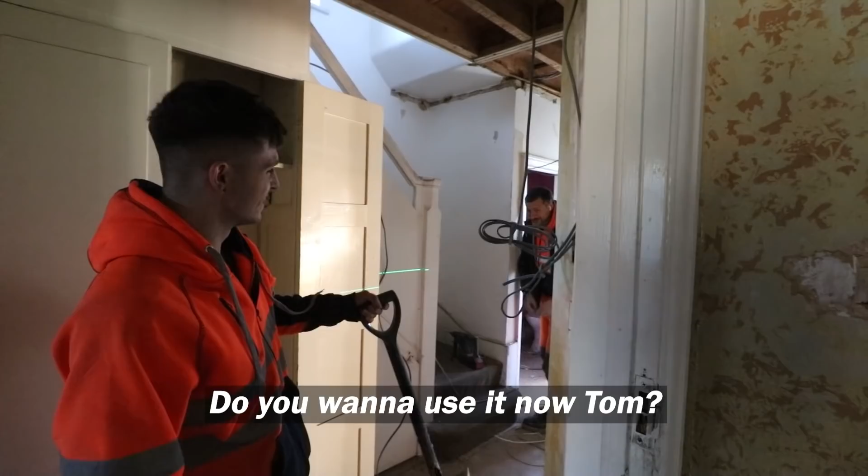I'm actually not entirely sure. I will find out. But if you are listening, babe, I'm just saying, you've got to appreciate that. Do you see what I'm saying? Like, if I came home and said, babe, actually, I want to go back to the unit for a couple of hours, that would be unacceptable. I dug a hole, so I might as well keep going. Do you want to use it now, Tom?

Right, now super quick and dirty here. This is more for the apprentices. I remember when I was doing my training in year 1, I could not get my head around two-way switching. I'm going to very quickly demonstrate it. Fuse board up here. All you've basically got is your 2 switches, so you've got common, L1, L2. You take your 1mm 2-core and earth, your normal 1mm or 1.5, whatever you're wiring in. Personally, I would say take it to the switch every time.

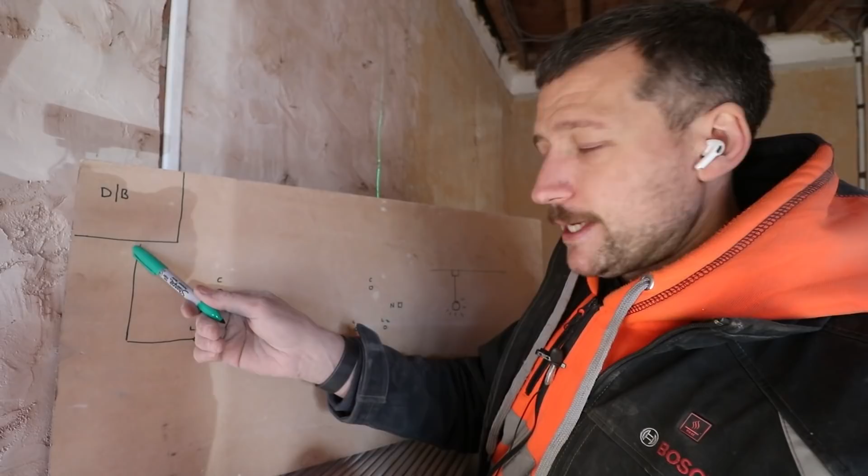The reason I'm saying that is because at most switches nowadays, not all of them, you're going to need a neutral. We've got smart switches, smart homes and stuff. A lot of light switches now have technology behind them which needs a neutral, a way back to the fuse board. If you take your feed straight to your light fitting up here, this is supposed to be a pendant, but it's more of an upside down lollipop, that's fine, and it will work. The problem is you're not going to have a neutral at the switch, and that will inhibit you at some point. So neutrals at the switch, guys.

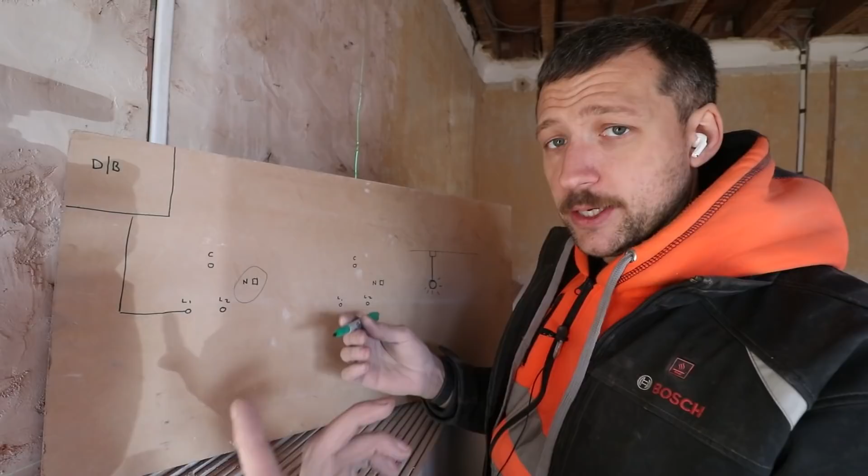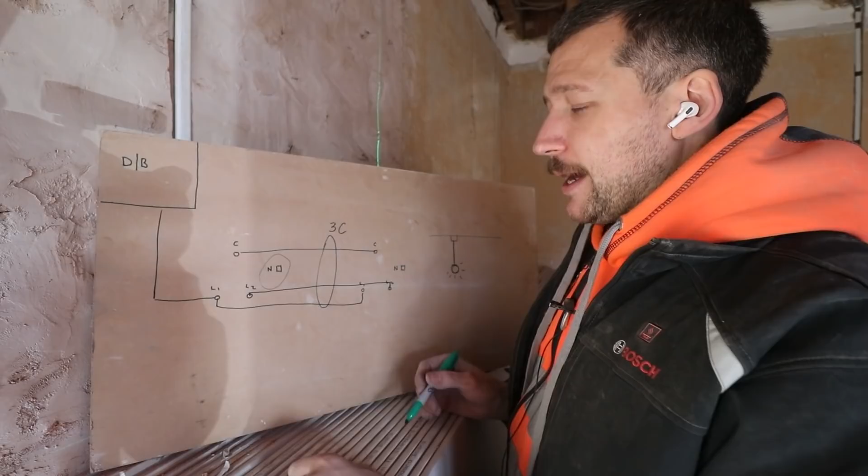Feed in straight to the switch, go straight to L1. You then take a 3-core and earth. And all you do, it's literally as simple as this. Bang. Bang. And that there is your 3-core. That's it. You're just literally linking those, just make it parallel. And then your L2, that's your trigger. So you feed in, and then your trigger is your L2. And obviously you'll take a neutral up there as well. That's literally all it is.

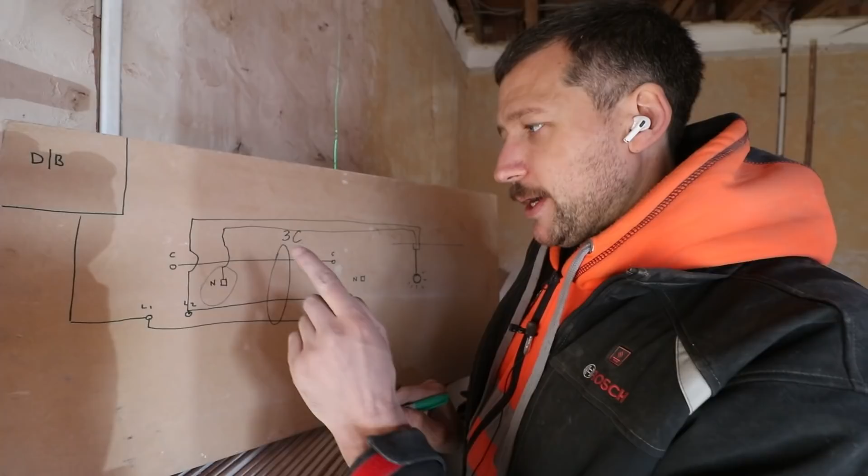The only thing I would say, I did it on a job once where I rewired a house and didn't think it through. I took the feed to the switch, but accidentally I took the switch wire off the other switch. The problem that gave me, my trigger didn't have a neutral because you've got a 3-core, so I had to end up dragging another 2-core across because I didn't have the neutral here. So wherever your feed goes to the switch, take your switch wire from that switch as well. But that's basically it, quick and dirty.

We've been umming and ahhing in the shop what to do with these Renault Trafics because we own these outright now. The Kangoo's still got finance on it, but these ones here are ours now. And I'm kind of wondering, do we keep them now?

Because the finance is done, they're bought and paid for now, so essentially they're just free vehicles now, just free motoring. But a lot of our work is East London and Essex now, and it doesn't make sense to run around in diesels now. What's your opinion? Should we get rid of one of these?

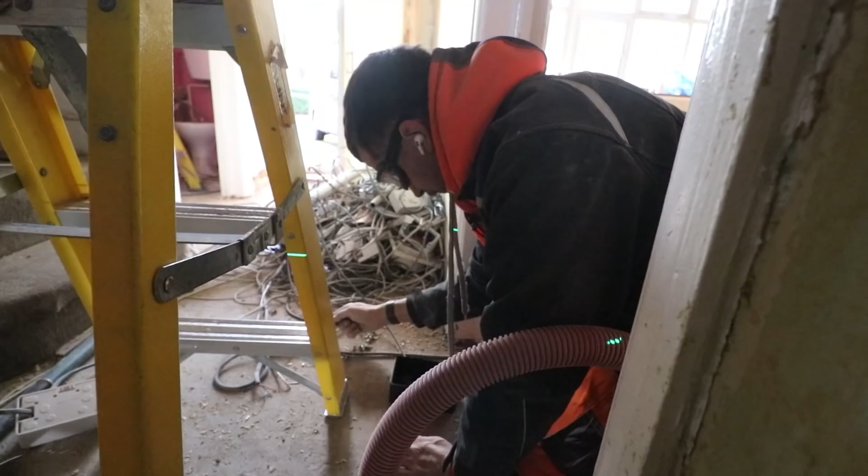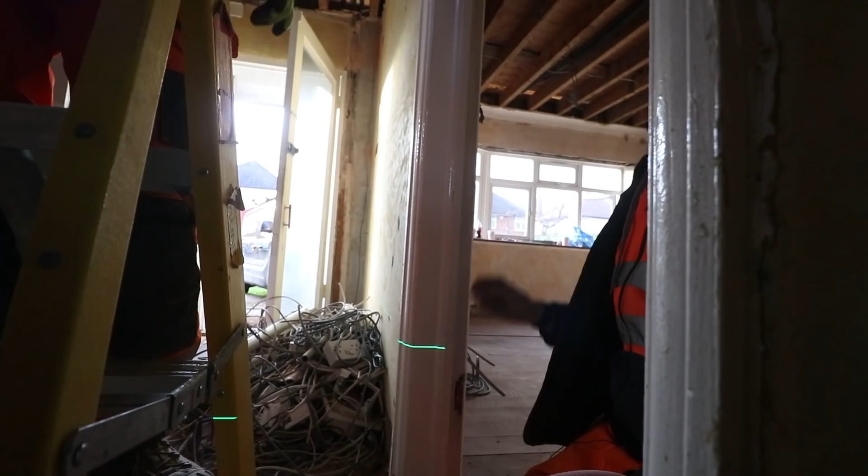I'm listening to Dire Straits, if you don't mind. What a day! What song? Sultans of Swing. Oh, my man. It's a classic. Never heard of it. You've never heard of it? Sing a bit. Come on, sing a bit. Nah, mate, no. It's only when everybody else is singing I can get in the groove. Right, there you go, Bosch. Sorry. Sarah's just texted me. I was in a happy place. I'm not now.

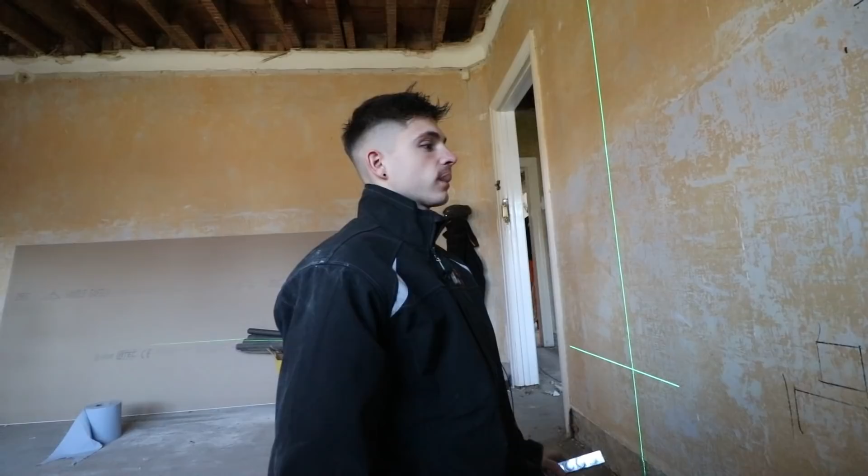If I just hold the light like that. Let me hold it. Oh, sorry, I'll do it. I'll do all the work, because I don't want the subscribers thinking I'm not making an effort. There you go. I'll give you an arm workout. I need to check the plans. I was going to say something else and I forgot. Ready, watch this now. No, look a mess. You recorded this. Yeah. Recorded everything.